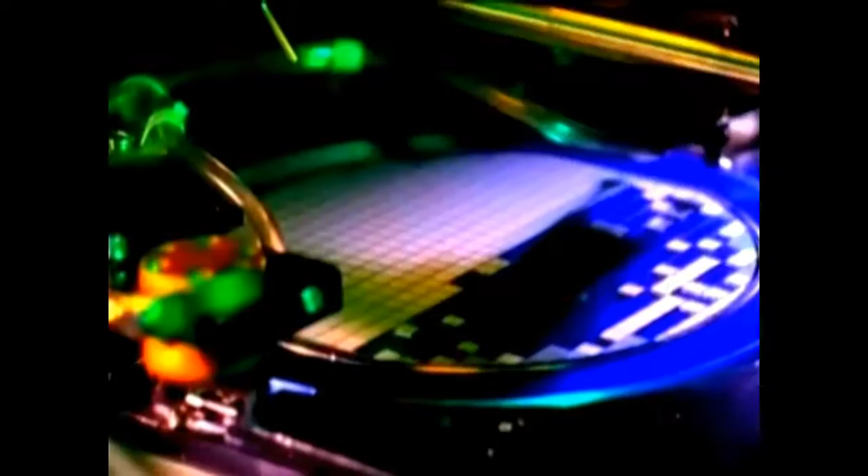Asan is the largest emerging city in the central region of Korea, and it is becoming the most dynamic city in Korea.

However, Asan, which has been called the city of tourism, culture, and industry, has suffered from life waste treatment issues. Humanity's reckless development, which did not regard the natural environment, created a massive amount of waste that nature can no longer treat naturally.

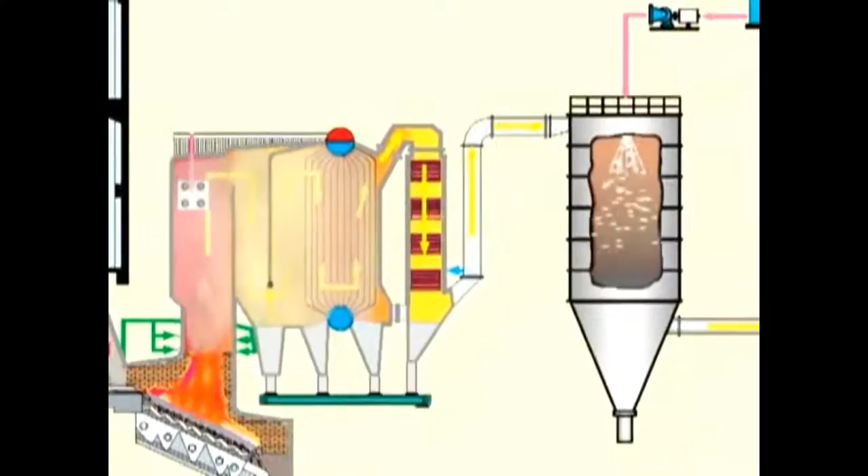This put people's lives at risk. To address it, Asan City constructed the advanced Asan Environment and Science Park in order to completely treat life waste in the city.

The park was also built to reuse waste heat generated along the process. The city selected the construction site through an open bid without disputes.

Located in Baemidong, Asan-si, South Chungcheong Province, the Asan Environment and Science Park is composed of an incinerator building, office building, community convenience facility building, Asan Green Tower, Environment Theme Park, and Jang Yeong-sil Science Museum.

The site covers an area of 107,809 square meters, where, under the best conditions with the best facilities, 200 tons of waste and sludge are safely incinerated each day.

Household waste is collected by garbage trucks from all around Asan city and sent to the cutting-edge incineration facility, where it is measured on the waste weight bridge passed through the carry-in site entrance, equipped with a malodor spread prevention system.

The waste is stored in the waste storage tank. Separately collected large-scale waste is fragmented in the crusher first and then stored in the storage tank.

Sludge is transferred from the carry-in storage tank at the sewage treatment plant to the dryer of the incinerator, and the dried sludge goes through the emission conveyor and is stored in the waste storage tank.

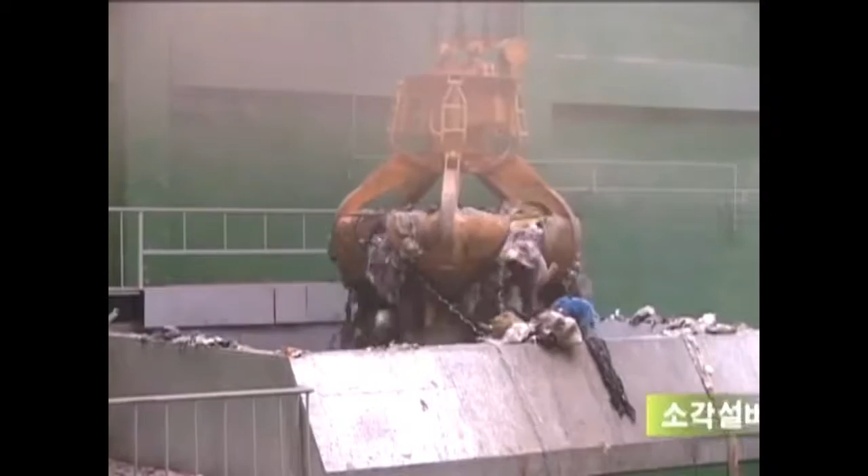The waste stored in the waste storage tank is mixed to have uniformity by a waste crane and sent to the incinerator. The waste put into the incinerator moves along the advanced piston-type grate.

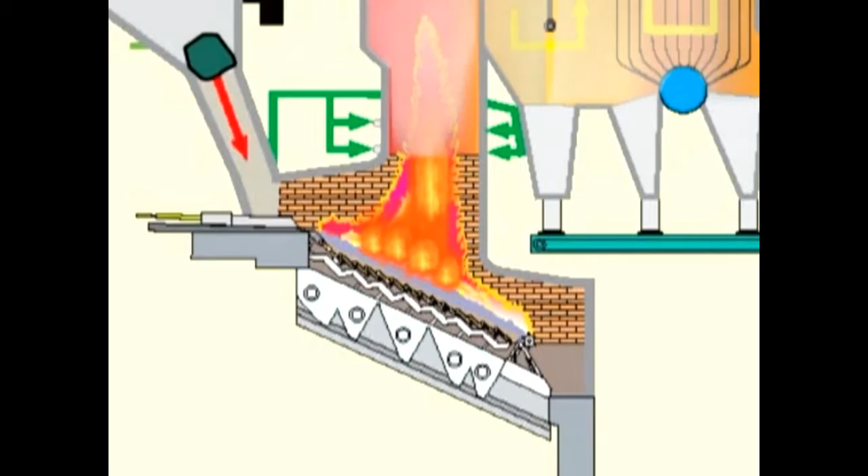It goes through three stages of combustion: drying, combustion, and post-combustion in the incinerator, where the temperature inside is more than 850 degrees Celsius in order to minimize harmful gas. The treatment of bottom ash and fly ash is outsourced.

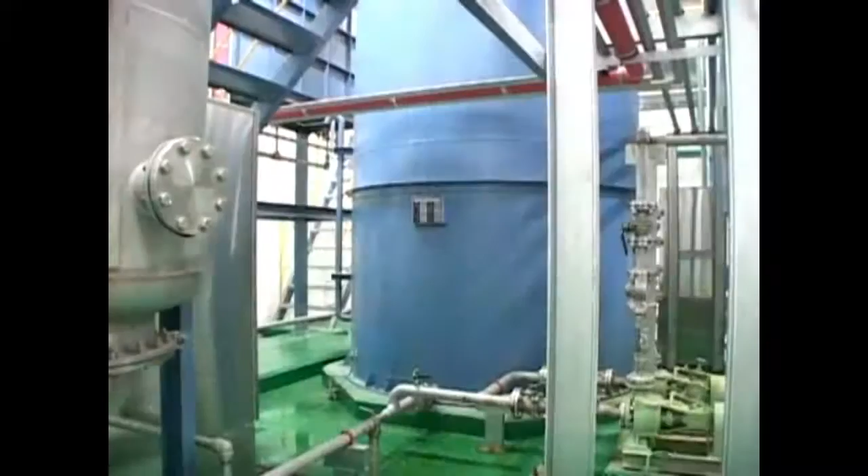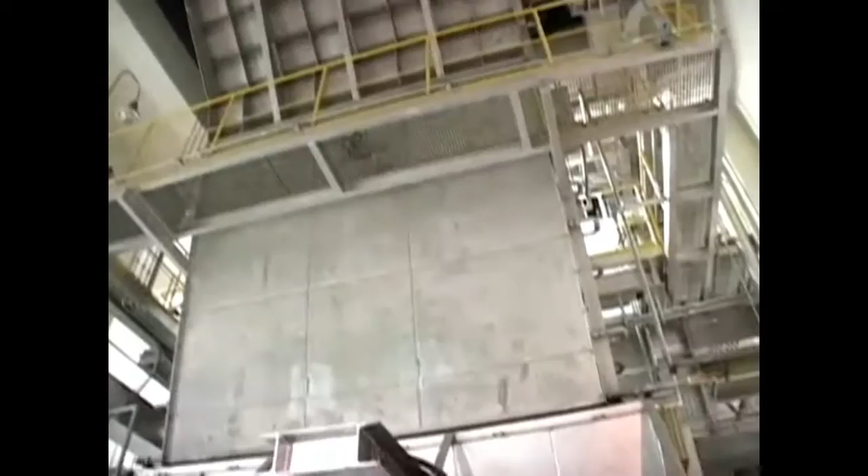The wastewater generated in the waste storage tank is sprayed into the incinerator by the wastewater spray pump and combusted at high temperature. The malodor generated in the process is provided to the incinerator as combustible air and is combusted with waste, treated so it does not leak outside the incinerator.

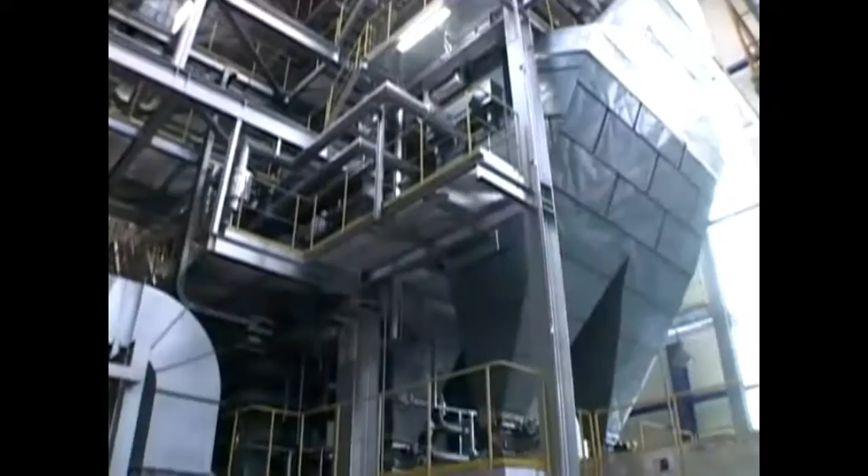The exhaust gas generated from the waste incineration process is used to cool the exhaust gas from over 850 degrees Celsius down to 210 degrees Celsius using the waste heat boiler, a cooling facility.

The cooled-off gas is then purified in the exhaust gas treatment facility.

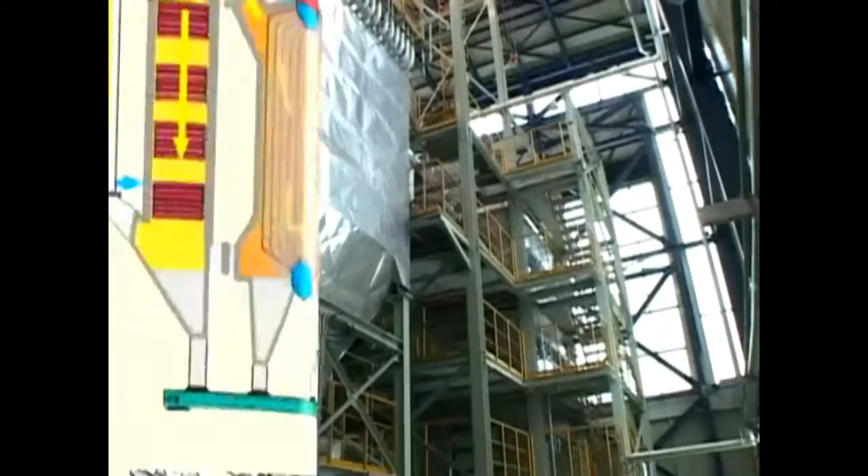Ammonium water is sprayed from the nitrogen oxide elimination facility at the incinerator exit to eliminate nitrogen oxide. Slaked lime slurry is sprayed from the semi-dry reaction tower installed at the back of the waste heat boiler to eliminate sulfur oxides and hydrogen chloride.

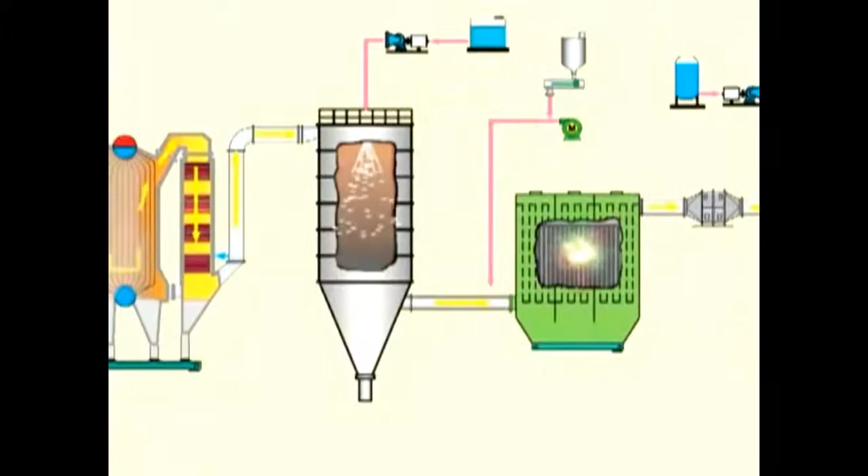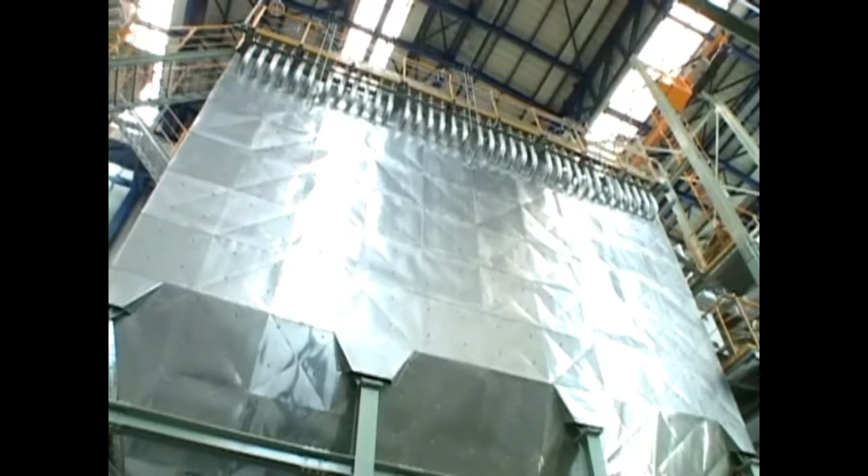Activated carbon is sprayed from the back to absorb and eliminate dioxin and heavy metals included in the exhaust gas, and the reaction filter dust collector eliminates ash to purify the exhaust gas.

Reactant and absorbed activated carbon are collected, stored in ton bags, and treated separately by an outsourcing service. The concentration of exhaust gas is measured in real time by the gas auto analysis system and made public on the outdoor signboard, then sent to the Ministry of Environment. The process is managed transparently and thoroughly to reassure citizens about pollution issues.

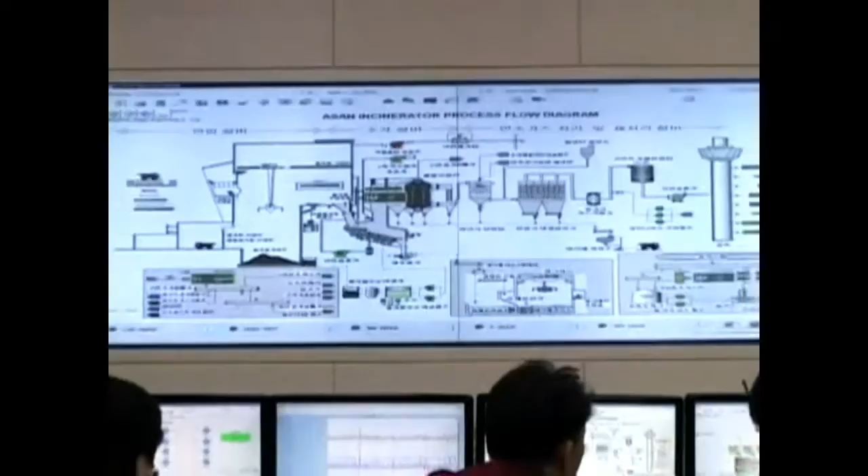In addition, all processes are managed and operated automatically from the central control room, which is equipped with the latest distribution control facility and monitored at all times to maintain the best operation status.

Asan Environment and Science Park does not only recycle wastes, but also provides a variety of cultural facilities to the community, including a community convenience facility, theme park, and observatory.

The Community Convenience Facility is a 3-story building set on a total area of 4,929 square meters for the leisure activities of citizens. Citizens can reduce their fatigue and take a shower in the sauna, located on the first floor. On the second floor, they can also do cardio exercises and weight training in the gym, which is equipped with a variety of exercise machines.

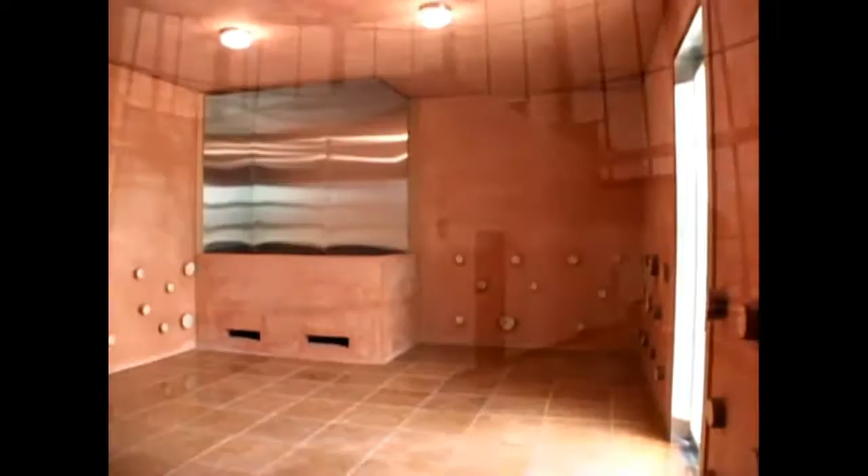The Korean dry sauna is also on the second floor, where people can take a shower and rest after exercise. The auditorium and aerobic room are on the third floor.

The 150-meter-tall Asan Green Tower has a 2-story establishment at an altitude of 128 meters. Asan City's landmark tower has an observatory on the first floor and a restaurant on the second floor of the installation.

The Botanical Tower is composed of a tropical plant garden, Korean flower garden, and many other spaces for various activities. Visitors can take lessons about living nature and learn the importance of the environment.

The waterfront space utilizes water, light, and sound for citizens to recharge themselves with nature. Youth can have a pleasant time in the facility, themed Dynamic Asan, and can develop their intellectual strength in the fossil field.